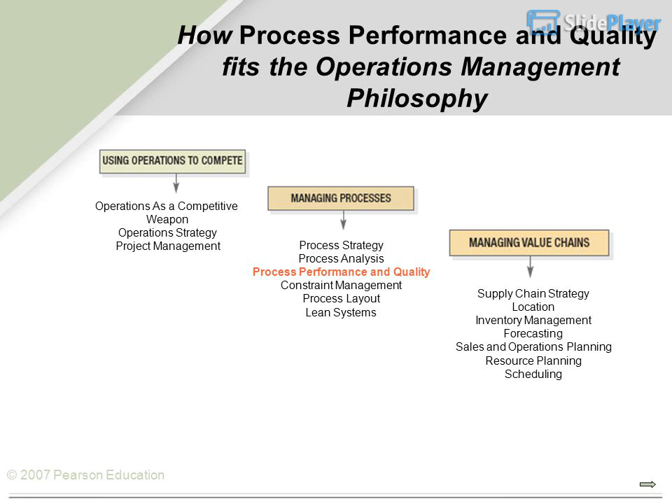How process performance and quality fits the operations management philosophy: operations as a competitive weapon, operations strategy, project management, process strategy, process analysis, process performance and quality, constraint management, process layout, lean systems, supply chain strategy, location, inventory management, forecasting, sales and operations planning, resource planning, and scheduling. Quality at Crowne Plaza, Christchurch.

The Crowne Plaza is a luxury hotel with 298 guest rooms, 3 restaurants, 2 lounges, and 260 employees to serve 2,250 guests each week. Customers have many opportunities to evaluate the quality of services they receive.

Prior to the guest's arrival, the reservation staff gathers a considerable amount of information about each guest's preferences. Guest preferences are shared with housekeeping and other staff to customize service for each guest. Employees are empowered to take preventative, and if necessary, corrective action.

Costs of poor process performance. Defects: any instance when a process fails to satisfy its customer.

Prevention costs are associated with preventing defects before they happen. Appraisal costs are incurred when the firm assesses the performance level of its processes. Internal failure costs result from defects that are discovered during production of services or products. External failure costs arise when a defect is discovered after the customer receives the service or product.

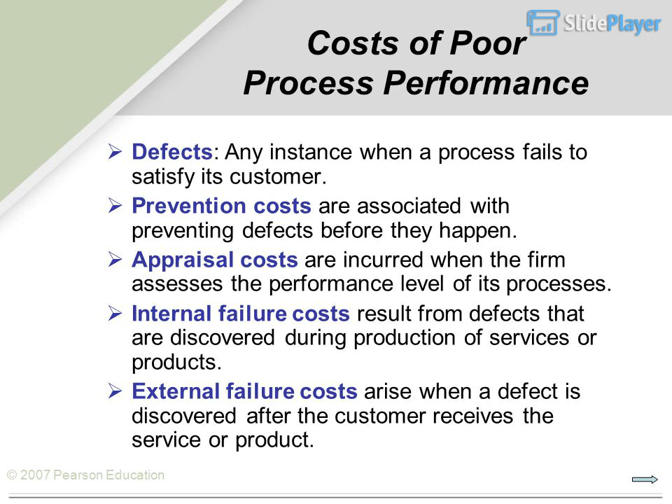Total quality management. Quality is a term used by customers to describe their general satisfaction with a service or product. Total quality management, TQM, is a philosophy that stresses three principles for achieving high levels of process performance and quality: customer satisfaction, employee involvement, and continuous improvement in performance.

Customer satisfaction. Customers, internal or external, are satisfied when their expectations regarding a service or product have been met or exceeded.

Conformance: how a service or product conforms to performance specifications. Value: how well the service or product serves its intended purpose at a price customers are willing to pay. Fitness for use: how well a service or product performs its intended purpose. Support: support provided by the company after a service or product has been purchased. Psychological impressions: atmosphere, image, or aesthetics.

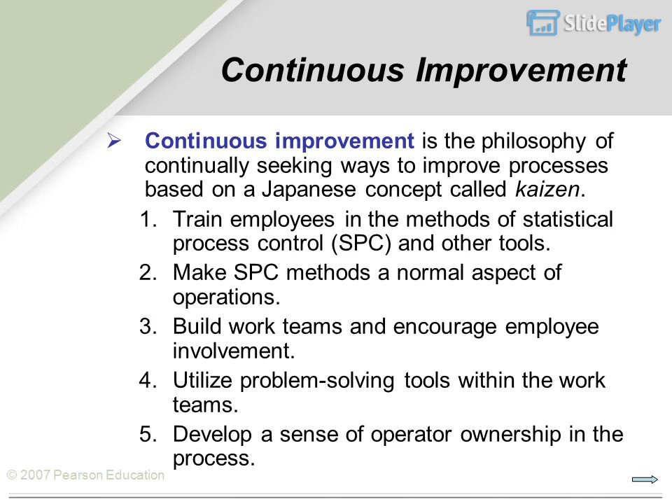Train employees in the methods of statistical process control, SPC, and other tools. Make SPC methods a normal aspect of operations. Build work teams and encourage employee involvement. Utilize problem-solving tools within the work teams. Develop a sense of operator ownership in the process.

Statistical Process Control. Statistical process control is the application of statistical techniques to determine whether a process is delivering what the customer wants. Acceptance sampling is the application of statistical techniques to determine whether a quantity of material should be accepted or rejected based on the inspection or test of a sample.

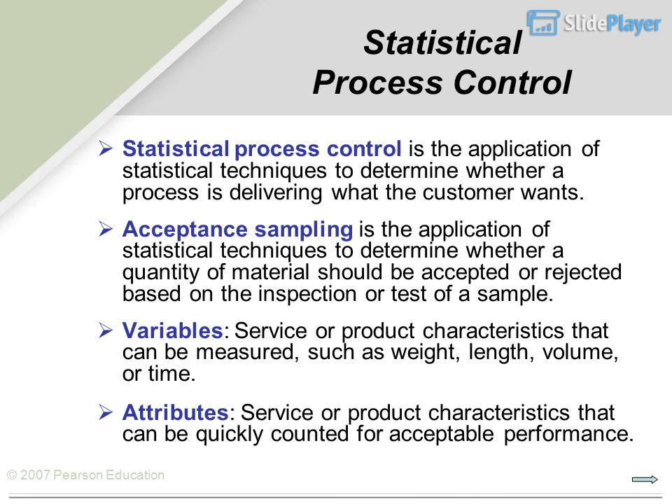Variables are service or product characteristics that can be measured, such as weight, length, volume, or time. Attributes are service or product characteristics that can be quickly counted for acceptable performance.

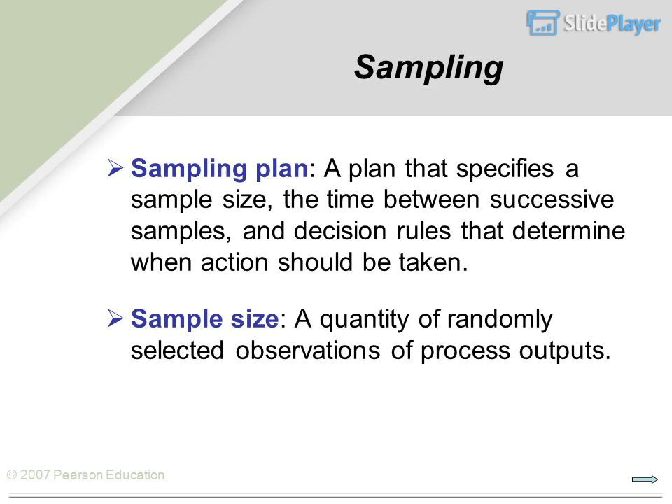Sampling. A sampling plan specifies a sample size, the time between successive samples, and decision rules that determine when action should be taken. Sample size is a quantity of randomly selected observations of process outputs, sample means, and the process distribution.

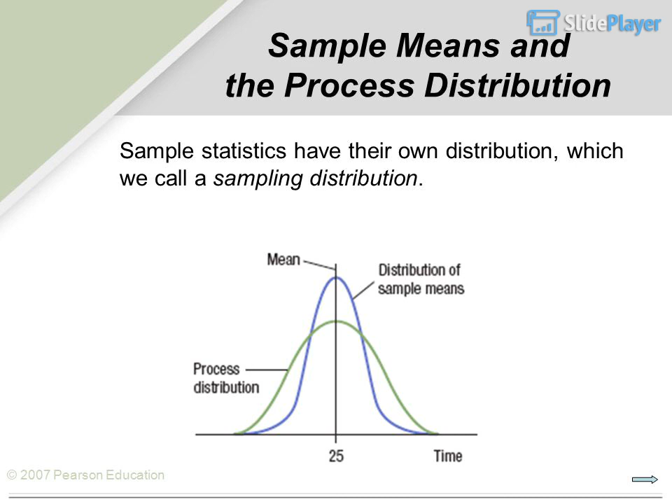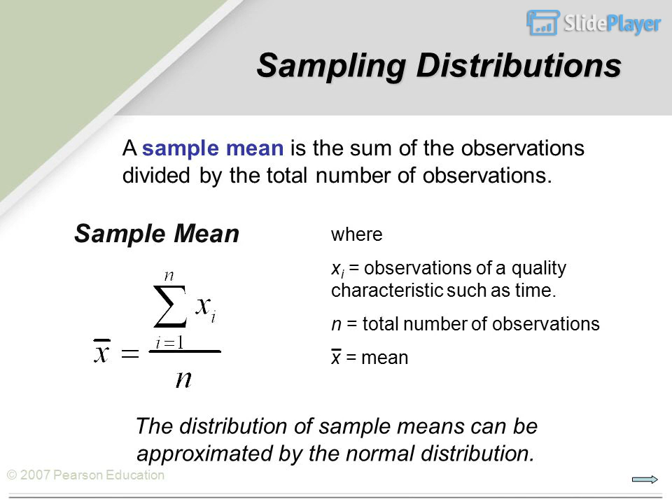Sample statistics have their own distribution, which we call a sampling distribution. A sample mean is the sum of the observations divided by the total number of observations, where x sub i equals observations of a quality characteristic such as time, N equals total number of observations, and X-bar equals the mean. The distribution of sample means can be approximated by the normal distribution.

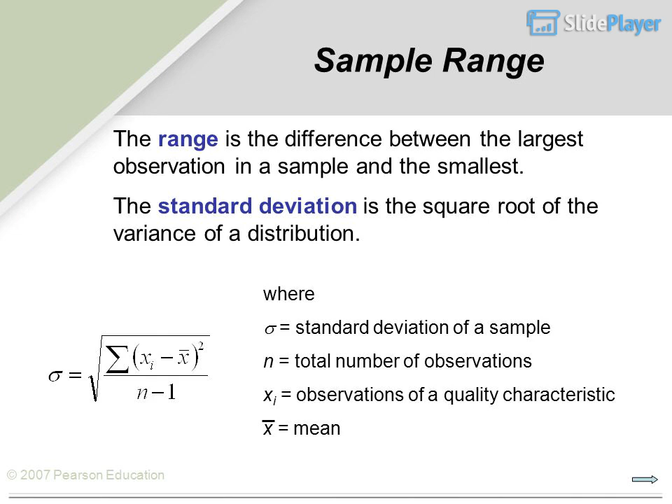N equals total number of observations, x sub i equals observations of a quality characteristic, and X equals mean. Process distributions.

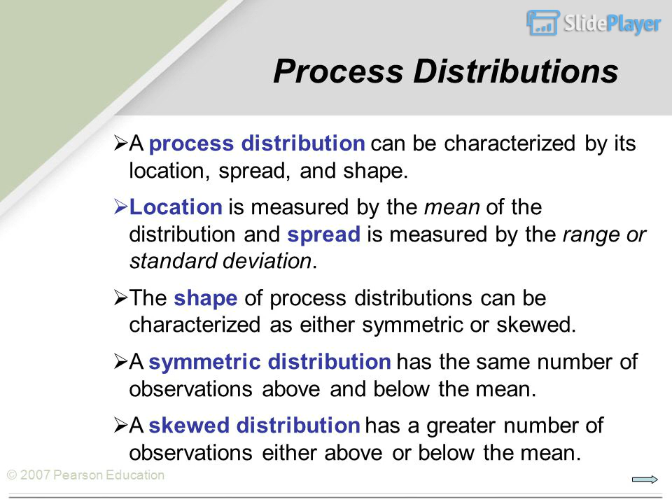A process distribution can be characterized by its location, spread, and shape. Location is measured by the mean of the distribution, and spread is measured by the range or standard deviation. The shape of process distributions can be characterized as either symmetric or skewed. A symmetric distribution has the same number of observations above and below the mean, while a skewed distribution has a greater number of observations either above or below the mean.

Causes of variation.

Two basic categories of variation in output include common causes and assignable causes. Common causes are the purely random, unidentifiable sources of variation that are unavoidable with the current process. If process variability results solely from common causes of variation, a typical assumption is that the distribution is symmetric, with most observations near the center.

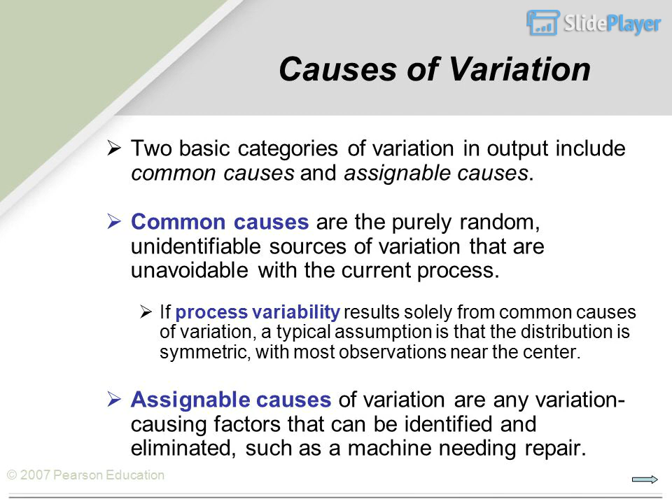A process is said to be in statistical control when the location, spread, or shape of its distribution does not change over time. After the process is in statistical control, managers use SPC procedures to detect the onset of assignable causes so that they can be eliminated.

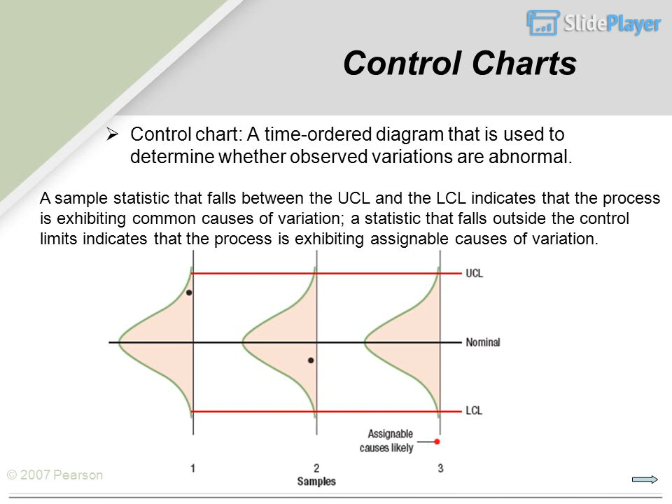Control charts: a time order diagram used to determine whether observed variations are abnormal. A sample statistic that falls between the UCL and the LCL indicates that the process is exhibiting common causes of variation. A statistic that falls outside the control limits indicates that the process is exhibiting assignable causes of variation.

Type 1 and 2 errors. Control charts are not perfect tools for detecting shifts in the process distribution because they are based on sampling distributions. Two types of error are possible with the use of control charts.

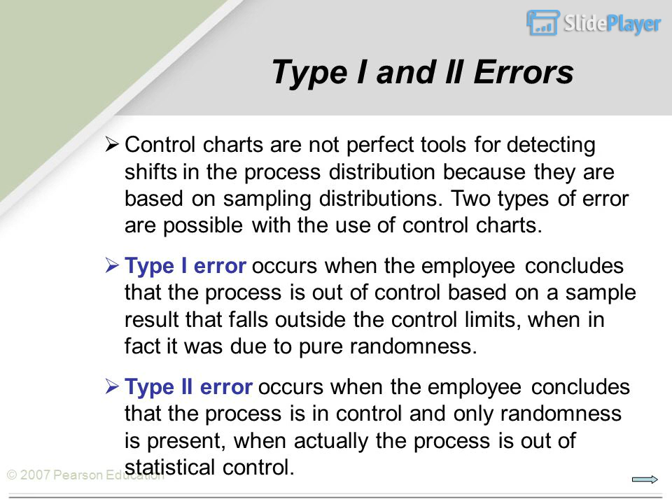Type I error occurs when the employee concludes that the process is out of control based on a sample result that falls outside the control limits, when in fact it was due to pure randomness. Type 2 error occurs when the employee concludes that the process is in control and only randomness is present, when actually the process is out of statistical control.

Statistical process control methods: control charts for variables are used to monitor the mean and variability of the process distribution. The R chart, or range chart, is used to monitor process variability. The X chart is used to see whether the process is generating output, on average, consistent with a target value set by management, or whether its current performance is consistent with past performance. If the standard deviation of the process is known, we can place UCL and LCL at Z standard deviations from the mean at the desired confidence level.

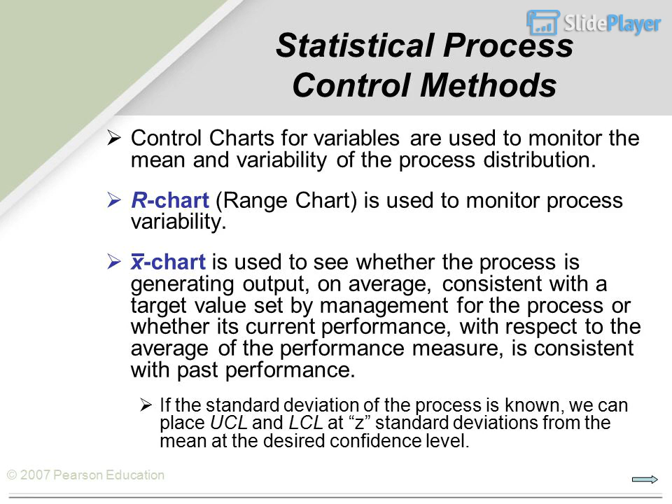UCL equals X-bar plus A2 times R-bar, and LCL equals X-bar minus A2 times R-bar. The control limits for the X chart are UCL equals X-bar plus A2R and LCL equals X-bar minus A2R, where X-bar equals the central line of the chart, which can be either the average of past sample means or a target value set for the process. A2 equals the constant to provide 3 sigma limits for the sample mean.

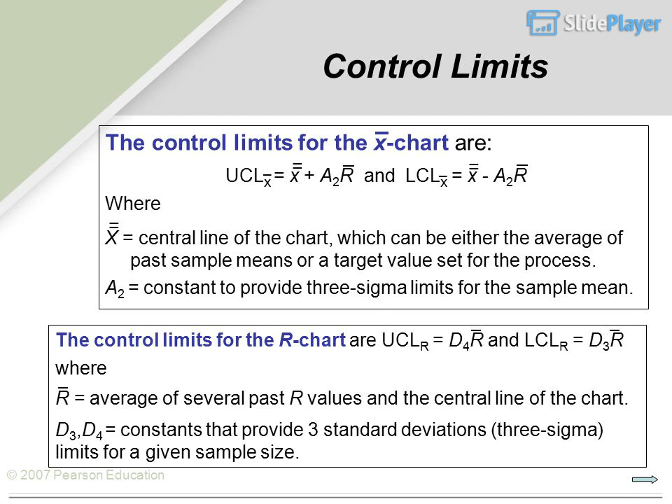The control limits for the R chart are UCL-R equals D4 times R-bar, and LCL-R equals D3 times R-bar, where R-bar equals the average of several past R values and is the central line of the chart. D3 and D4 equal constants that provide 3 standard deviation, or 3 sigma, limits for a given sample size, used in calculating 3 sigma limits.

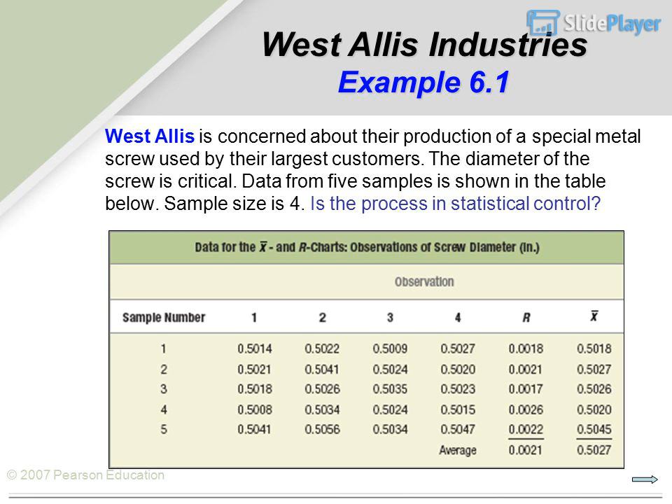Table 6.1, West Allis Industries, Example 6.1. West Allis is concerned about their production of a special metal screw used by their largest customers. The diameter of the screw is critical. Data from 5 samples is shown in the table below, with a sample size of 4. Is the process in statistical control? West Allis Industries control chart development, Example 6.1.

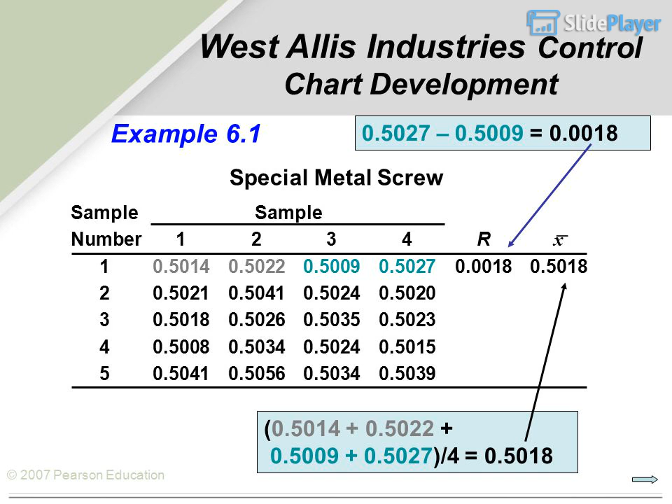Sample data table: Sample 1 readings are 0.5014, 0.5022, 0.5009, and 0.5027, giving a range of 0.0018 and a mean of 0.5018. Additional samples 2 through 5 include readings such as 0.5021, 0.5041, 0.5024, 0.5020, 0.5018, 0.5026, 0.5035, 0.5023, 0.5008, 0.5034, 0.5024, 0.5015, 0.5041, 0.5056, 0.5034, and 0.5039, used to build the West Allis Industries completed control chart data for the special metal screw example.

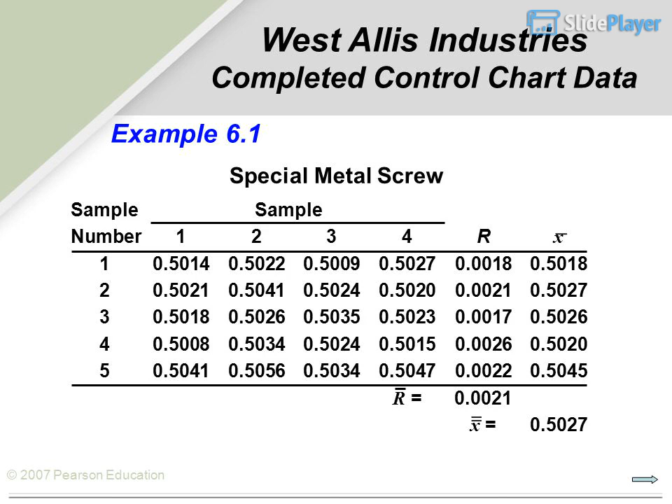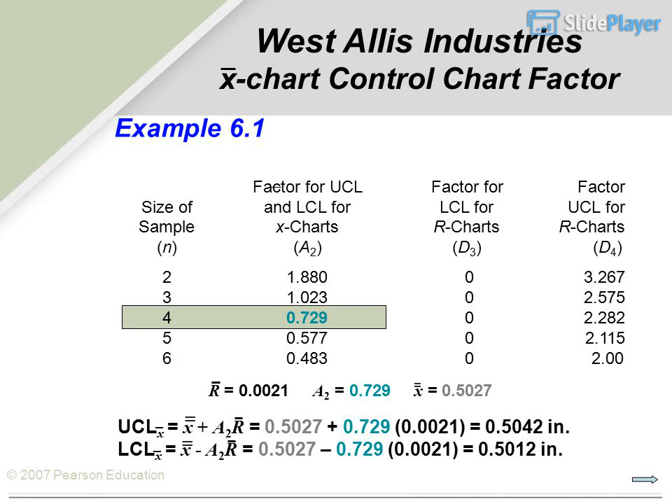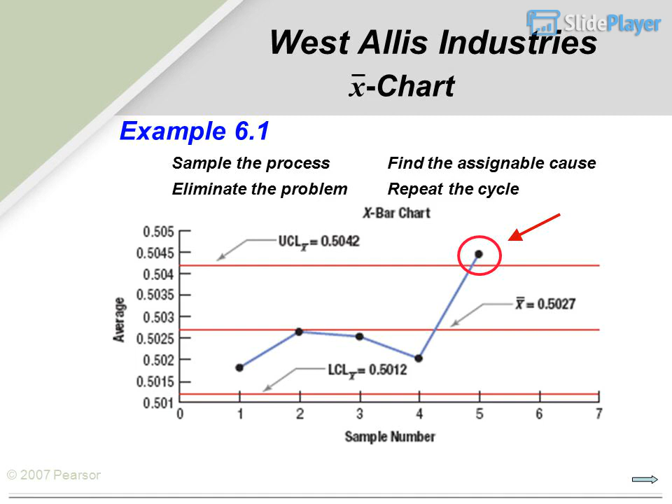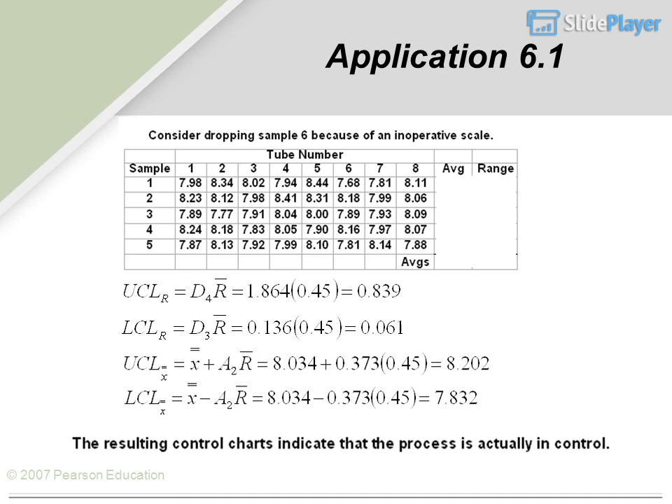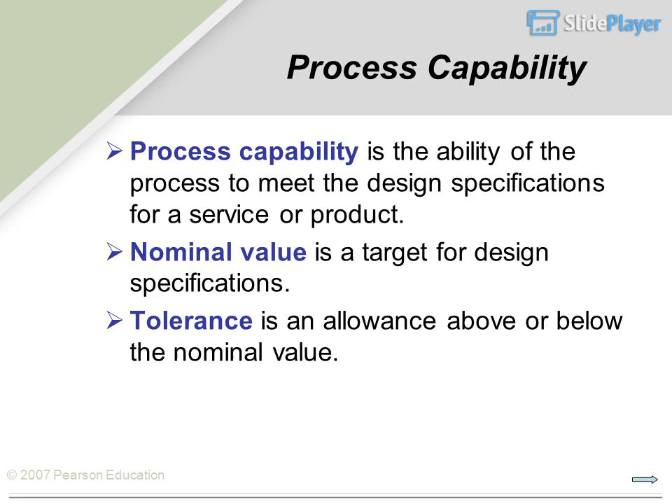Process capability is the ability of the process to meet the design specifications for a service or product. Nominal value is a target for design specifications. Tolerance is an allowance above or below the nominal value.

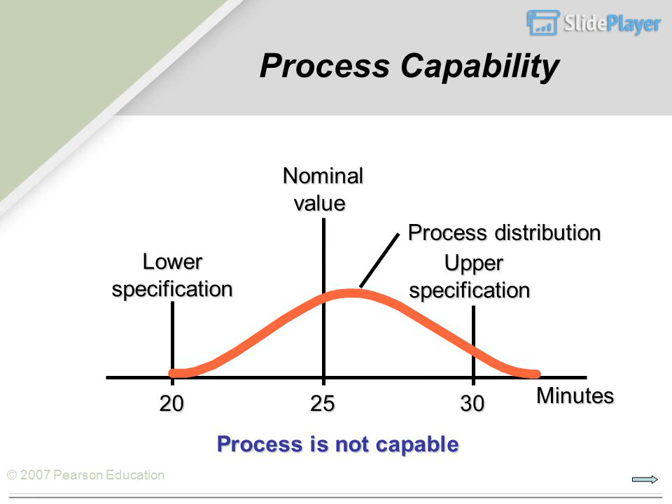This chart again shows the upper specification, lower specification, and nominal value relative to the process distribution. In this case, the process is not capable.

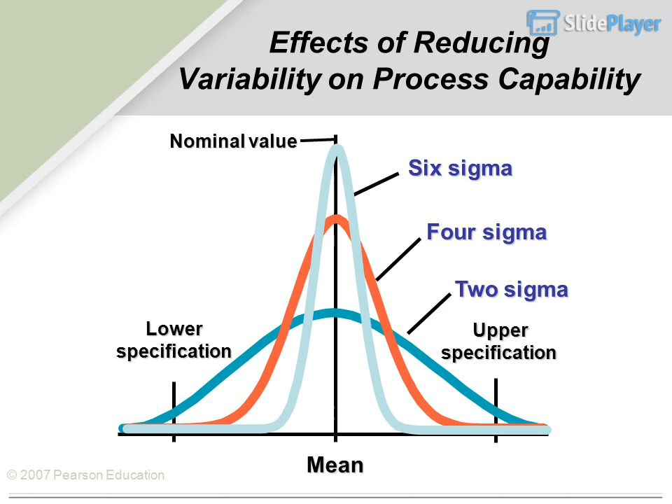This illustrates the effects of reducing variability on process capability, showing the lower specification, mean, and upper specification across 6 sigma, 4 sigma, and 2 sigma levels of variability.

The process capability index, CPK, is an index that measures the potential for a process to generate defective outputs relative to either the upper or lower specification. CPK equals the minimum of (upper specification minus X-bar) divided by 3 sigma, or (X-bar minus lower specification) divided by 3 sigma. We take the minimum of the two ratios because it gives the worst case situation.

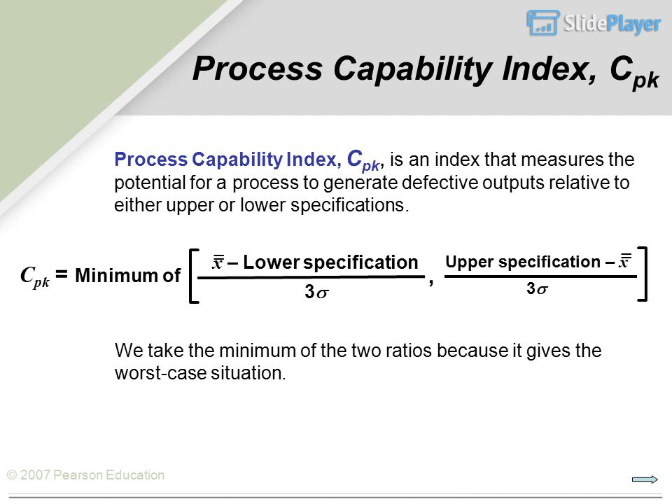The process capability ratio, CP, is the tolerance width divided by 6 standard deviations of process variability. CP equals (upper specification minus lower specification) divided by 6 sigma.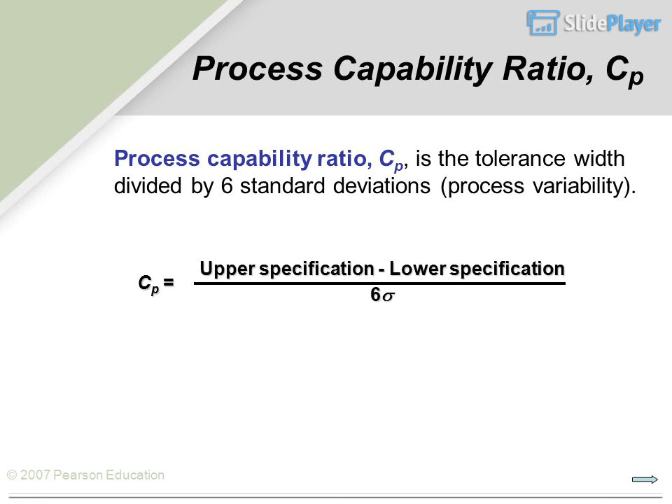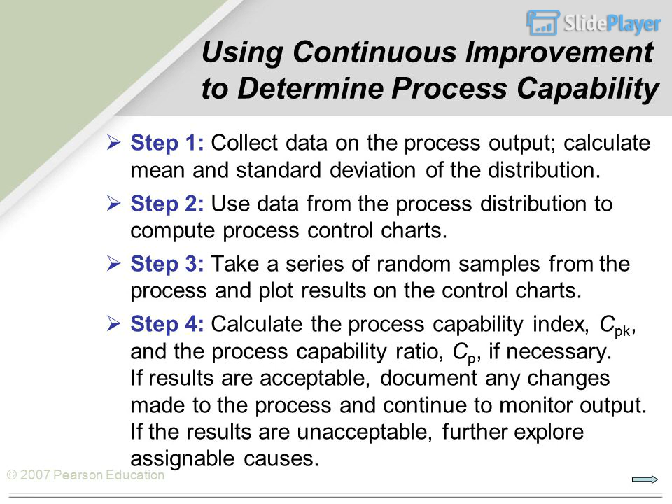Using continuous improvement to determine process capability: Step 1, collect data on the process output and calculate the mean and standard deviation of the distribution. Step 2, use data from the process distribution to compute process control charts. Step 3, take a series of random samples from the process and plot results on the control charts. Step 4, calculate the process capability index CPK and the process capability ratio CP if necessary. If results are acceptable, document any changes made to the process and continue to monitor output. If the results are unacceptable, further explore assignable causes.

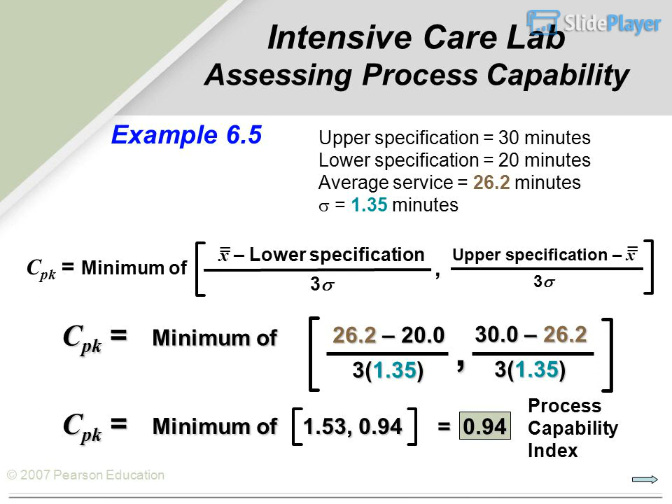Process Capability Index, Example 6.5, Intensive Care Lab assessing process capability. CP equals (upper specification minus lower specification) divided by 6 sigma. CP equals (30 minus 20) divided by 6 times 1.35, which equals 1.23. This process capability ratio does not meet the target of 1.33 CP for 4 sigma performance.

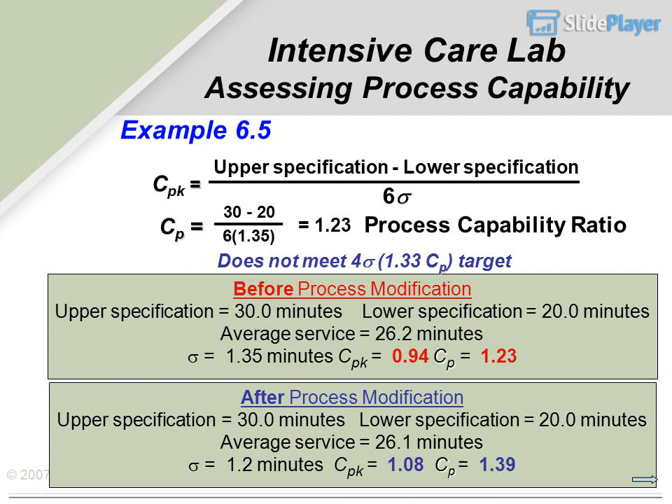Before process modification: upper specification equals 30.0 minutes, lower specification equals 20.0 minutes, average service equals 26.2 minutes, standard deviation equals 1.35 minutes, CPK equals 0.94, CP equals 1.23. After process modification: upper specification equals 30.0 minutes, lower specification equals 20.0 minutes, average service equals 26.1 minutes, standard deviation equals 1.2 minutes, CPK equals 1.08, CP equals 1.39.

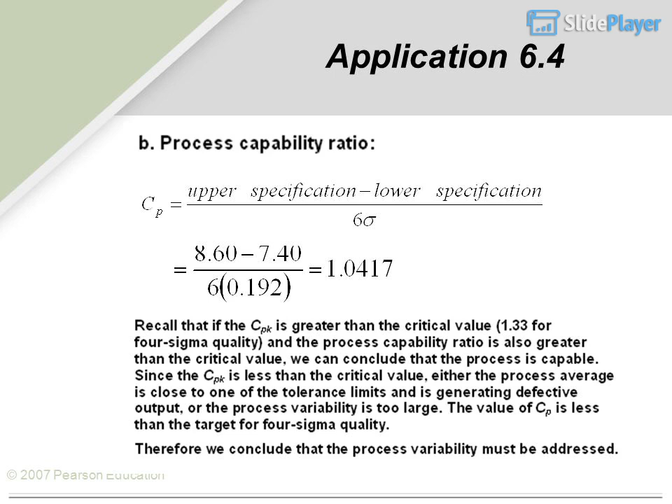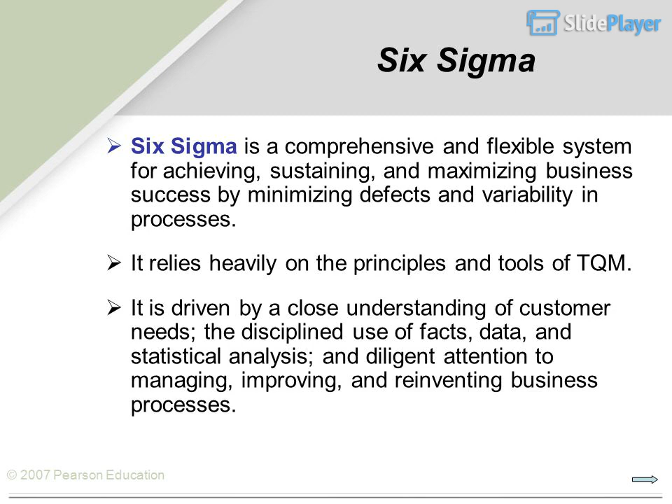Six Sigma is a comprehensive and flexible system for achieving, sustaining, and maximizing business success by minimizing defects and variability in processes. It relies heavily on the principles and tools of TQM. It is driven by a close understanding of customer needs, the disciplined use of facts, data, and statistical analysis, and diligent attention to managing, improving, and reinventing business processes.

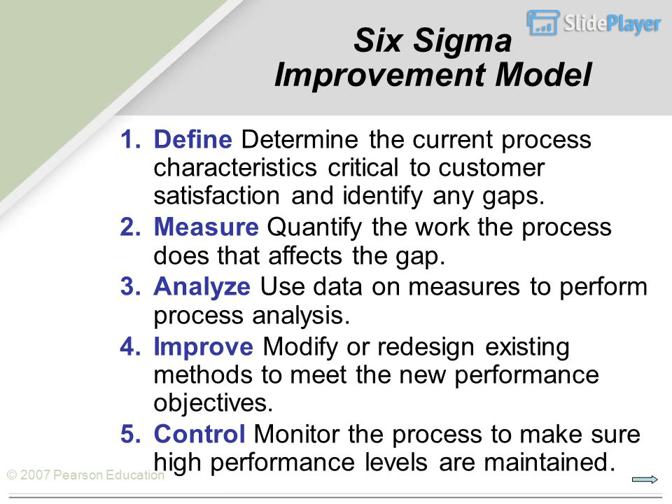The Six Sigma Improvement Model: determine the current process characteristics critical to customer satisfaction and identify any gaps. Quantify the work the process does that affects the gap. Use data on measures to perform process analysis. Improve by modifying or redesigning existing methods to meet new performance objectives. Monitor the process to ensure high performance levels are maintained.

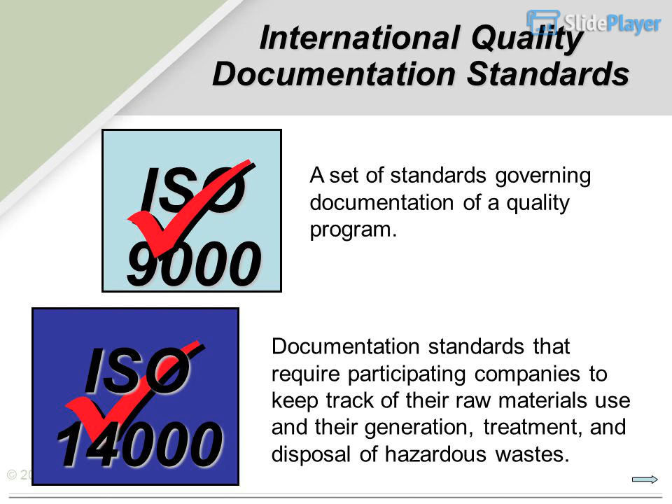International Quality Documentation Standards: ISO 9000 is a set of standards governing documentation of a quality program. ISO 14000 consists of documentation standards that require participating companies to keep track of their raw materials use and their generation, treatment, and disposal of hazardous wastes.